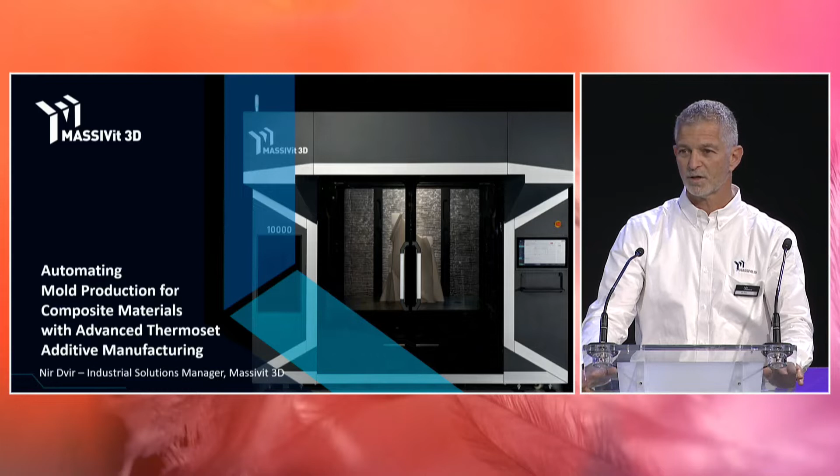Manufacturing molds in a conventional way consumes a lot of time and money. Massivit 3D's vision is to automate mold production. And the Massivit 10,000 that you can see here in the picture is part of our vision to automate mold production for composite material using additive manufacturing. But additive manufacturing also has challenges. A few of the biggest challenges are speed and size.

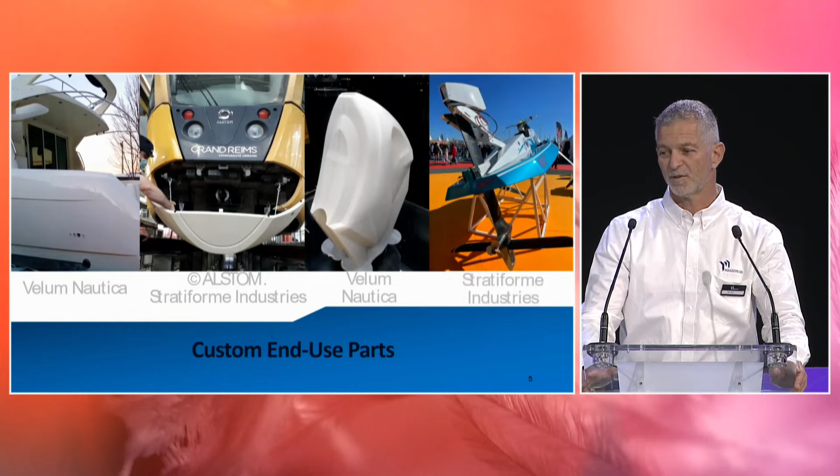Massivit 3D has been very familiar with speed and size for a few years already. Since 2013, our customers around the world are printing big and fast objects from marine, automotive, rail, and you can see a few samples. Also, prototyping full-scale concept models such as this car that was printed in France, furniture, and end parts or prototypes for automotive.

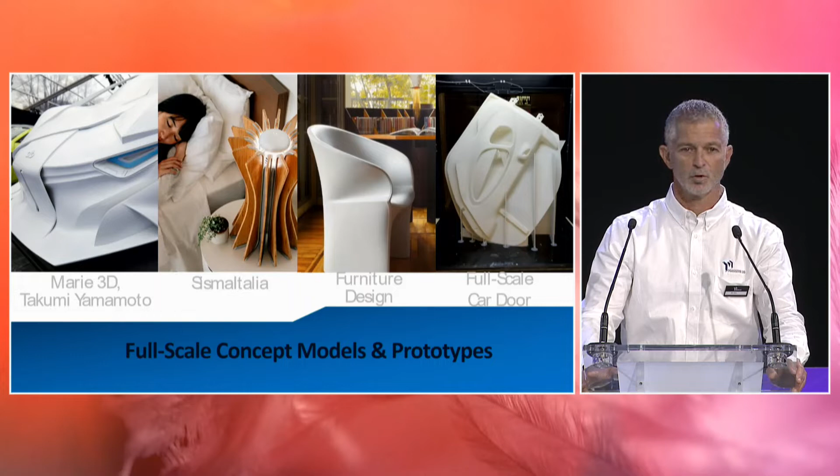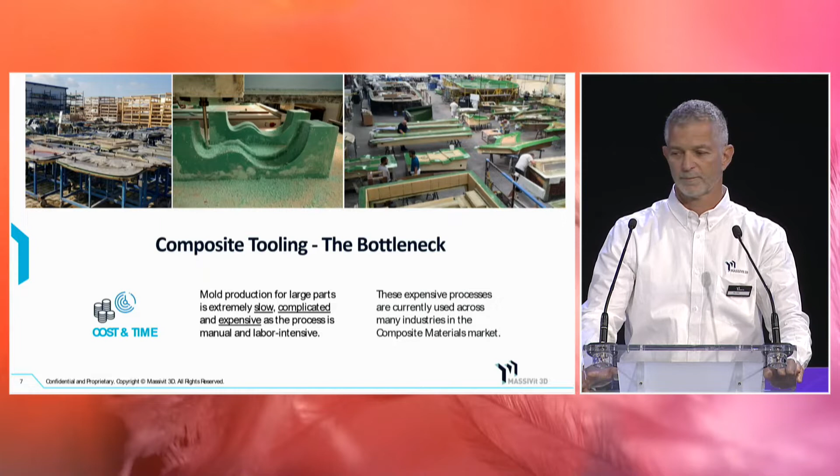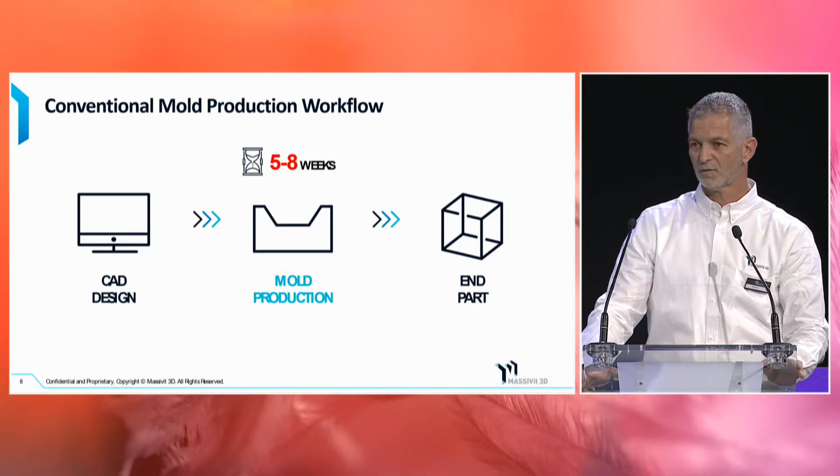But we are not here to talk about it. We are here to talk about composite tooling. We are going to talk about the bottleneck, which is mold manufacturing. Today, to produce a mold in a conventional way, you need 5 to 8 weeks. You might say less or more, but this is the average that we talk about. But what if we could make it faster? If we could automate this process and create molds in days instead of weeks?

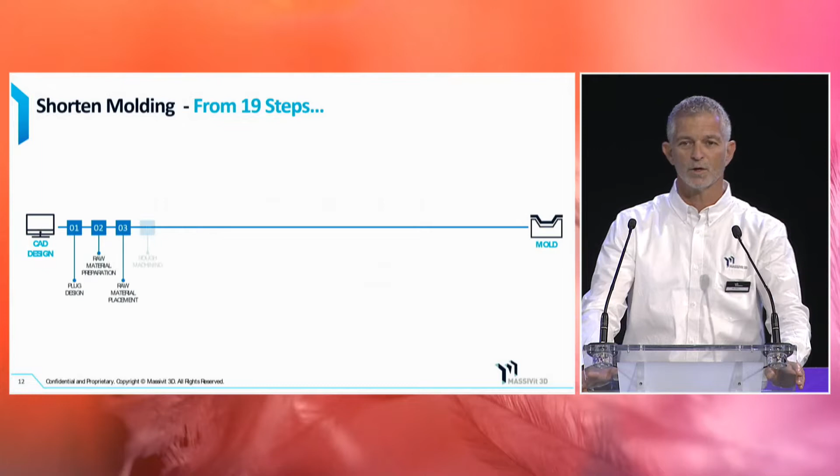The cast-in-motion technology will enable up to 80% faster tooling possibility. So how do we do it? Today, in order to create a mold, you need to create a master and a long process till you come to the end and can print your part. It will take you, again, 5 to 8 weeks.

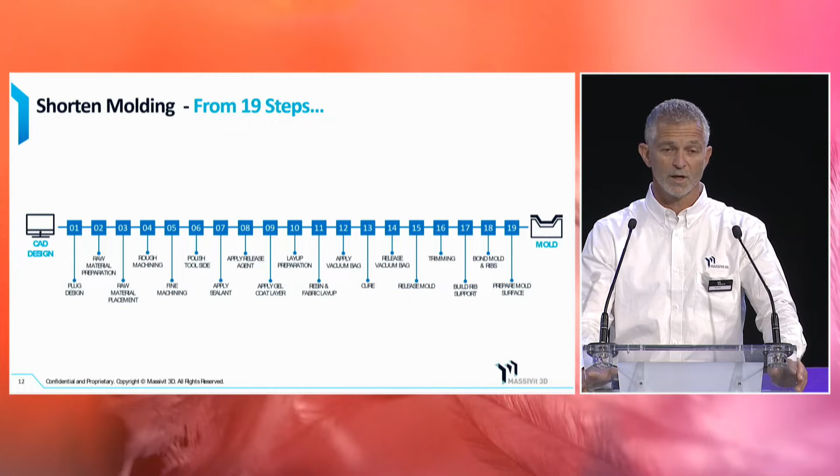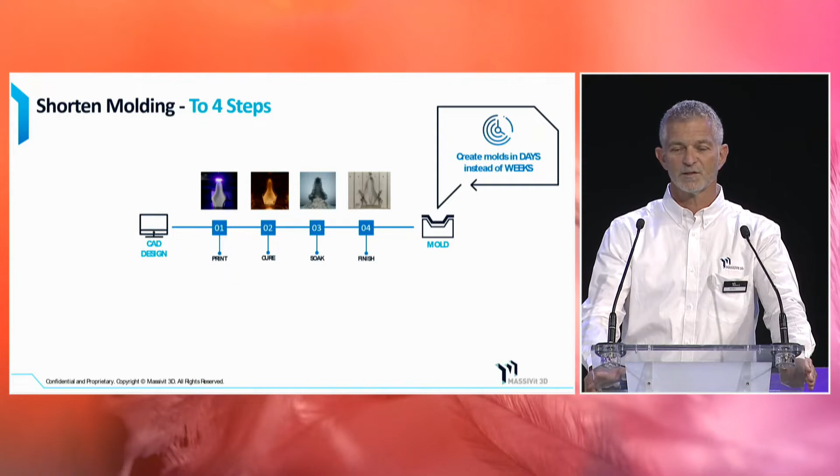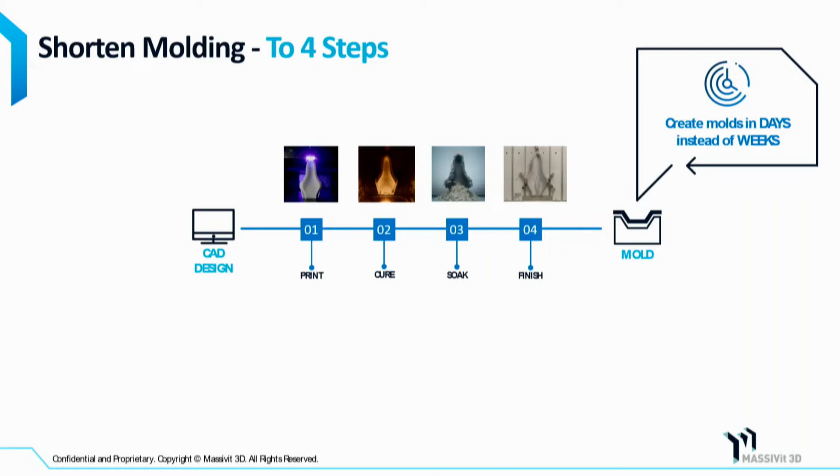With the cast-in-motion technology, we talk about 4 steps that will shorten this time. The first step, as you can see, is printing and casting epoxy into the print. Then it is the curing. After it's cured, we soak it in water. The shell will crumble off, and we remain with the part to be finished. Again, the idea is to generate molds in days instead of weeks.

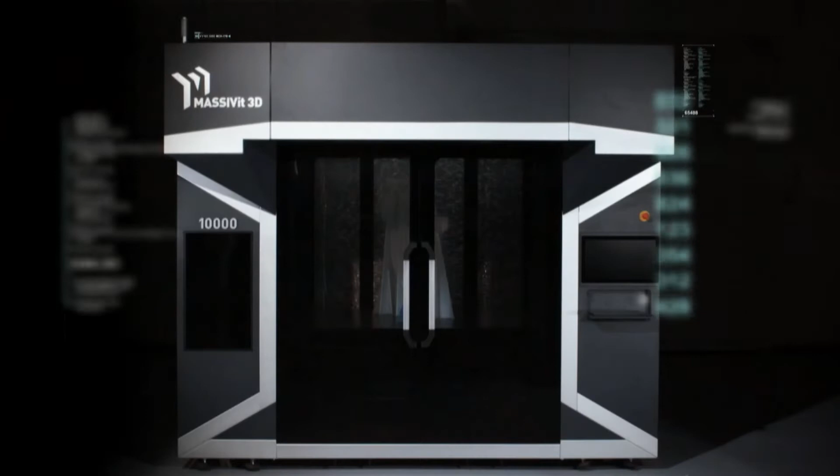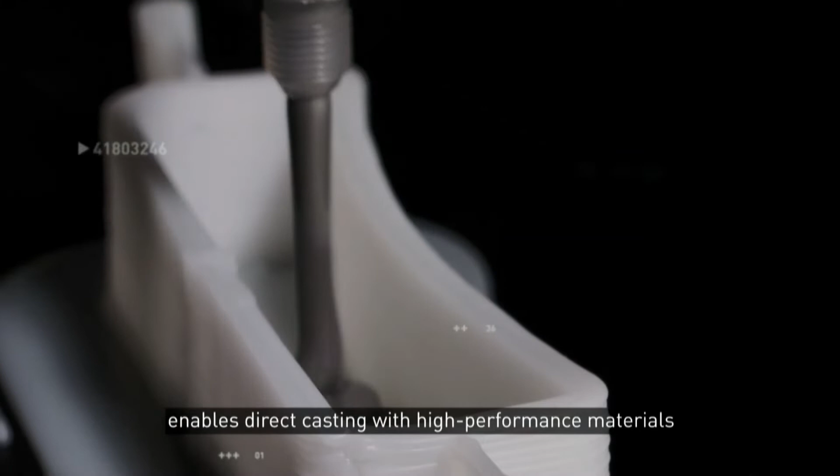I think we need volume for the video. But I think we can understand it also without the sound because it has subtitles.

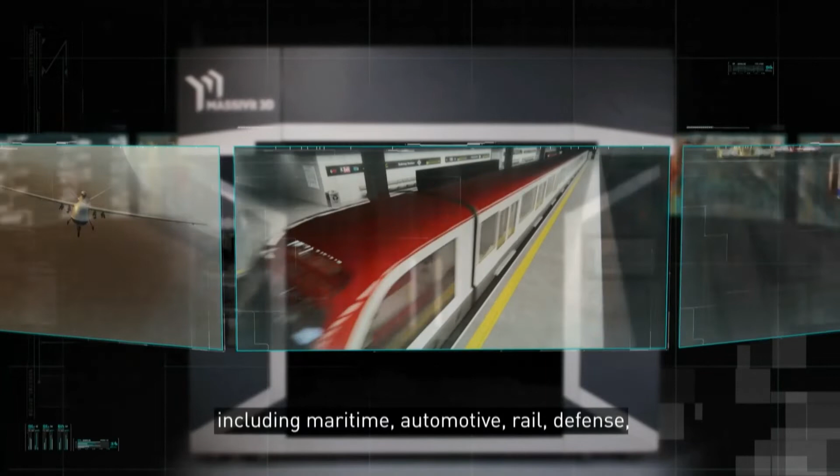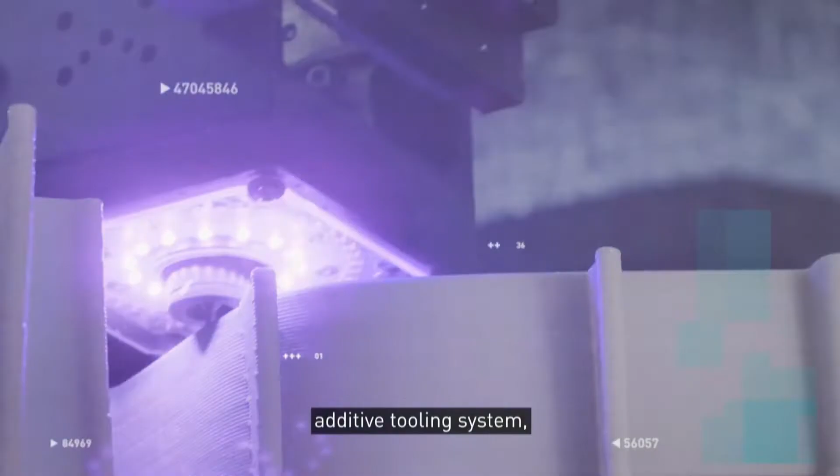So normally I use videos to explain what I want to explain, but today I'm going to support the video, as you haven't got to hear the sound. I want to jump directly into your mold that you want to produce. What you can see here is a mold already with the tooling, with everything that you need in order to produce it.

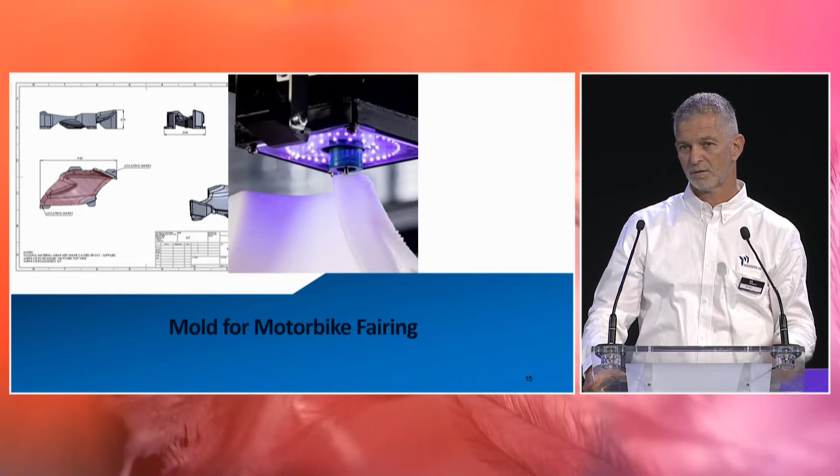On the left side, you see a head. This is our printing head. This is a dispenser, and out of this dispenser we are dispensing material that will cure immediately with the UV light. Once we have the shell printed, a casting head will come and cast epoxy into the shell that was just printed.

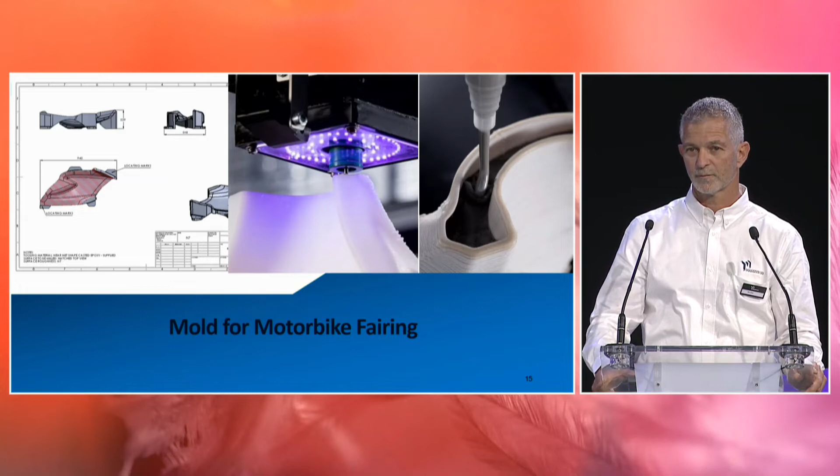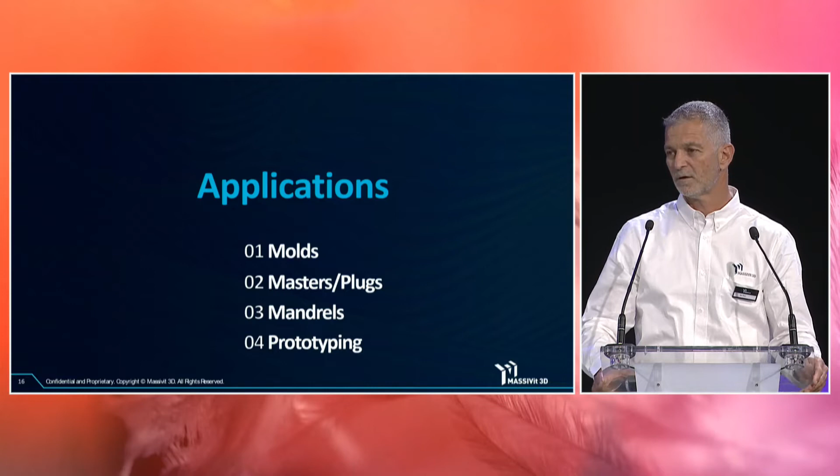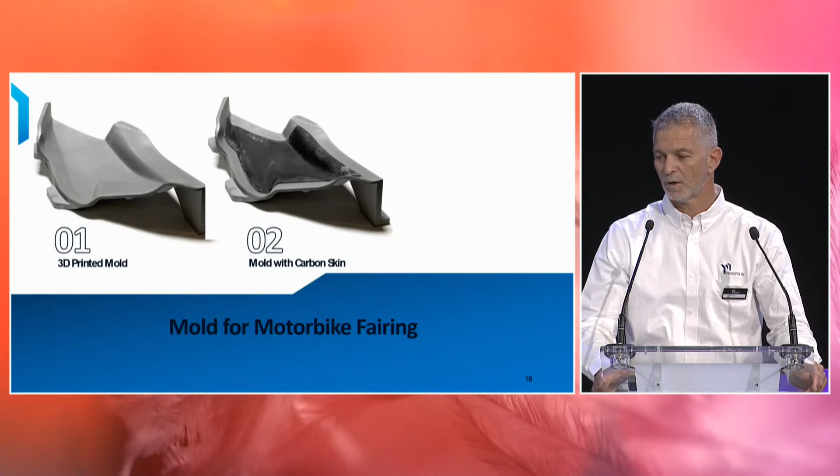What applications is the Massivit 10,000 covering? We talk about molds, masters, plugs, jigs and fixtures, mandrels, sacrificial patterns, and prototyping. Let's start with molds. The mold that you see here was printed on the Massivit 10,000 in just a few hours. As a standard process, you can see here the carbon fiber that was laid up and the part itself.

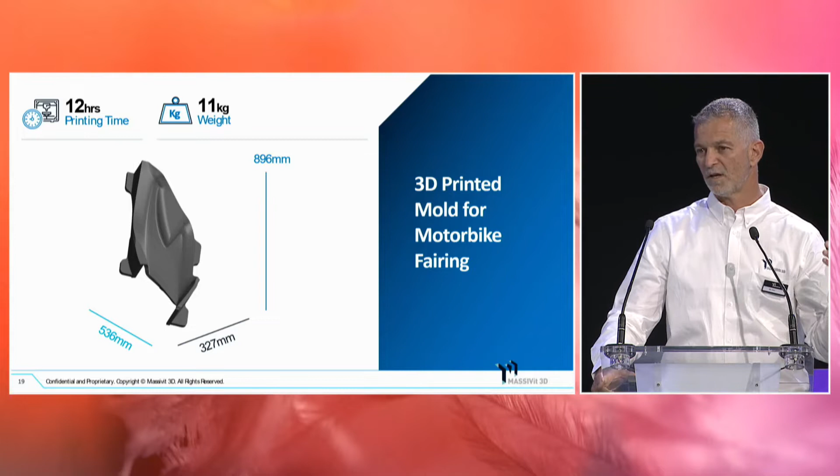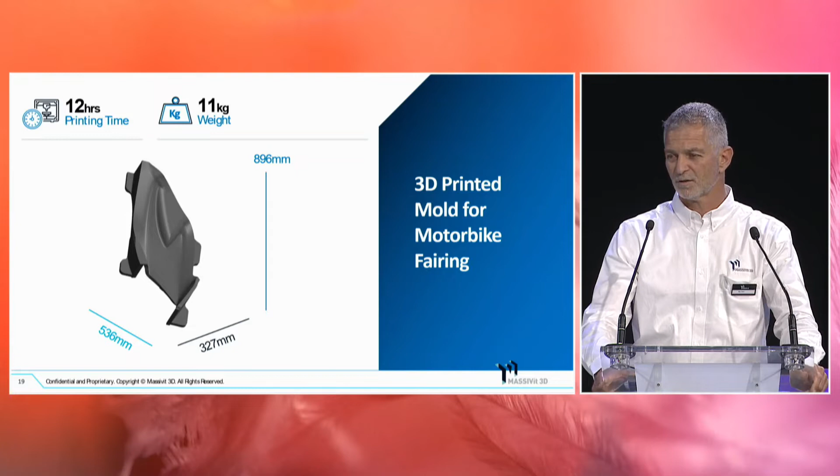Just to give an idea, within 12 hours, within less than a day, I have my mold ready without the need for any master before or the entire process. And the weight is only 11 kilograms. You can see that it's almost 900 millimeters, just less than a meter height.

More examples: a racing car seat. On the left side, number one, you can see the car seat with a specific design that we have done, tools that will be easy to handle, to put on the carriage or for anything in your process. You have the freedom in design and can print your structure as you wish.

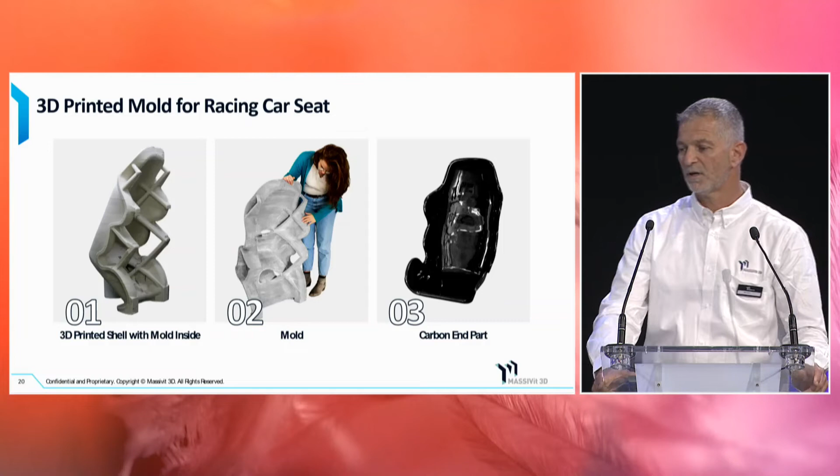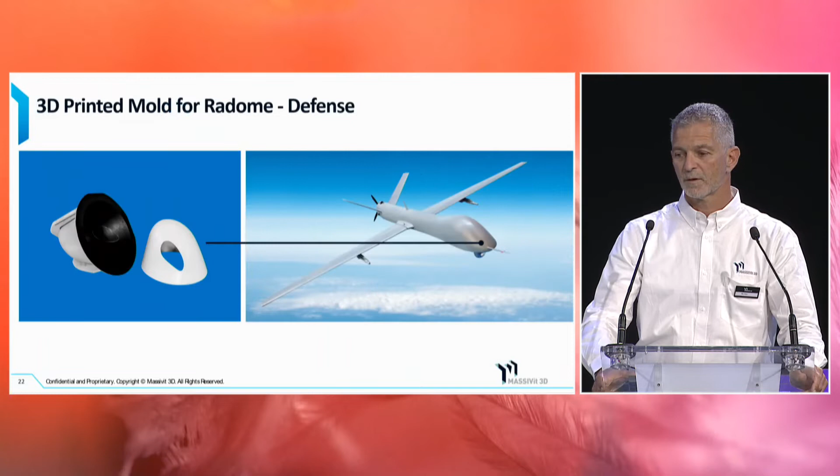What you see on the left side is the casted material and the shell itself. Number two is after we remove the shell, and number three is the carbon end part. Again here, it's almost 1 meter height, less than 2 days, only 42 hours to print it with 50 kilograms. More examples like radome that can be printed in less than half a day and 18 kilograms.

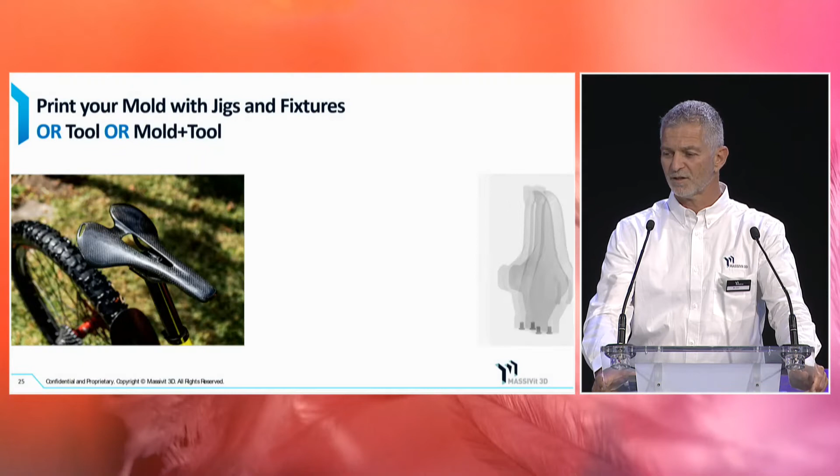But mold is only part of what can be produced with the Massivit 10,000. We talk about tools, jigs, and fixtures, or even a combination of those. Just as an example, we prepared something, and you can see it also at the Massivit 3D stand. Those are inserts that are getting, as part of the process, into the mold in order to allow a better workflow for your process, for the finishing process, for CNC in case that you are using it.

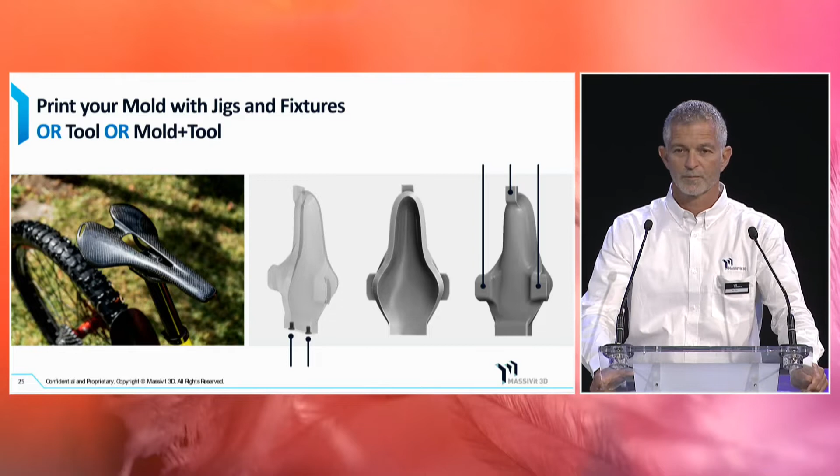Mandrel, sacrificial core, very important. What you can see on the right side is just the water breakable material print. No epoxy is involved. Again, we talk about mandrels that can be printed, that can be higher than 1.50 meters, and printing within hours. Why do I need it? In order to have complex molds for shapes that are complex or have a form that you cannot release the mold from. You just print a sacrificial pattern, and within a day you can have your mold ready.

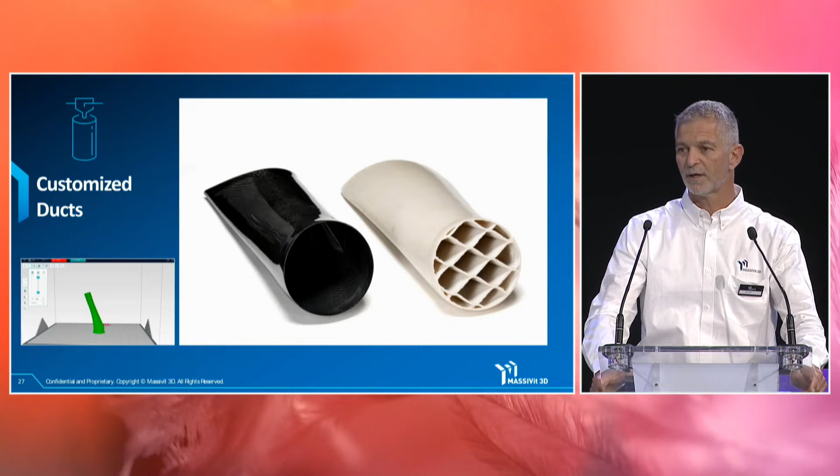Once you print the sacrificial pattern, you lay up your fabric with epoxy, you let it dry, you dip it in water, standard water, and the shell will crumble off, will fall off, and you will remain with your part.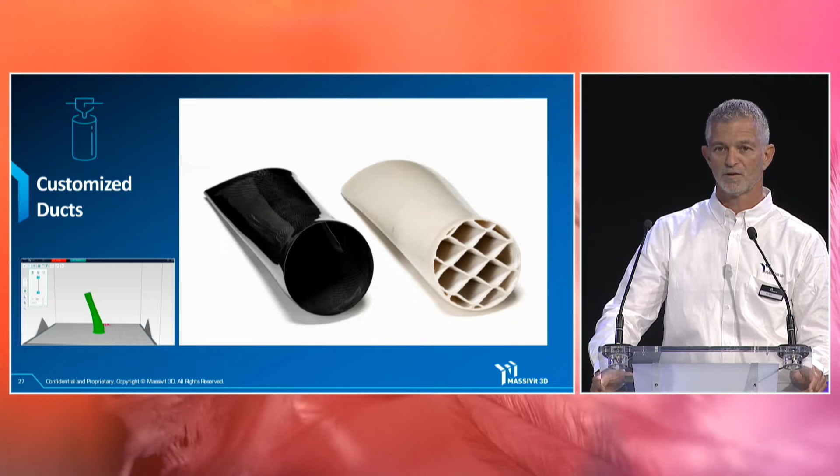Master and plugs. We talked before and explained that we want to save actually the master part, but it doesn't mean that you cannot print also your master. You can print mold, mandrel, master, plugs, anything, and there are cases where our customers would love to print also masters. In terms of prototyping or toolless manufacturing, for sure you do need that as well.

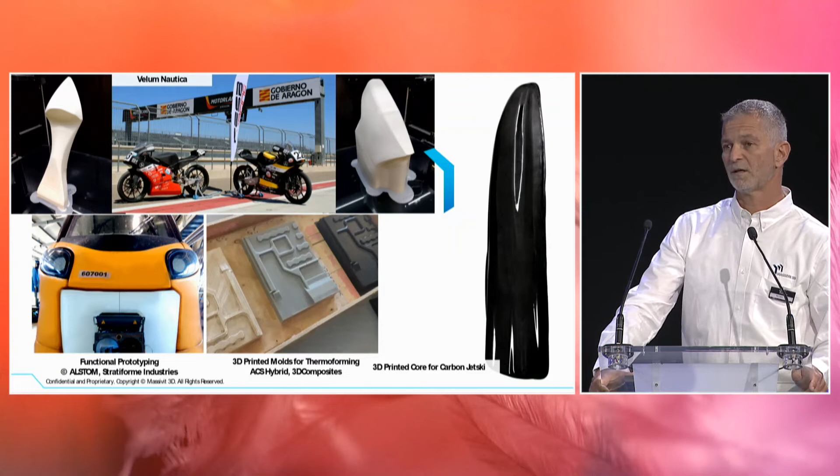And with additive manufacturing, with Massivit 10,000, you can also produce end parts. Here is an example for a motorbike or for the rail, actually here in France. Even a vacuum forming form that is generated by Massivit. Another interesting possibility is to leave the core and to use your fabric composite material on top of the core, as presented here at the jet ski hull.

Let's talk a little bit about the technology. As you can see, the Massivit, we talk about a print volume of approximately 1 meter 10 by 1 meter 40, and a height of 1 meter 50. Diagonal, we can reach up to approximately 1 meter 70. And we talk about the capability to print directly the mold, skipping any process, in just 4 steps, and we discussed it already, saving up to 80% of the time.

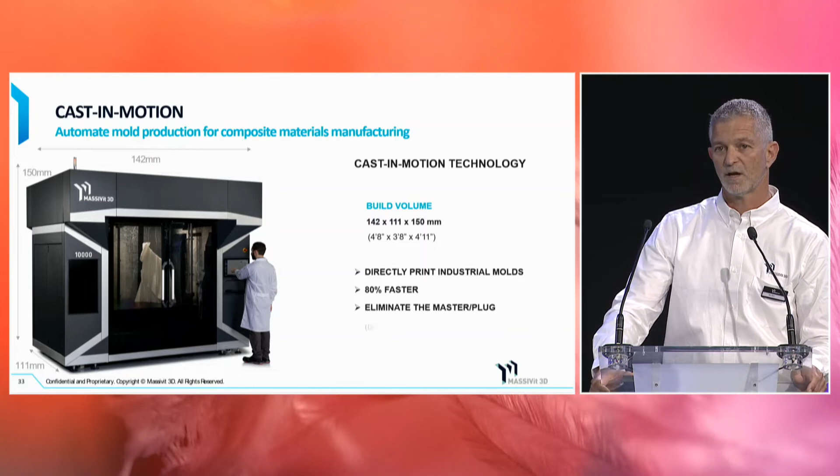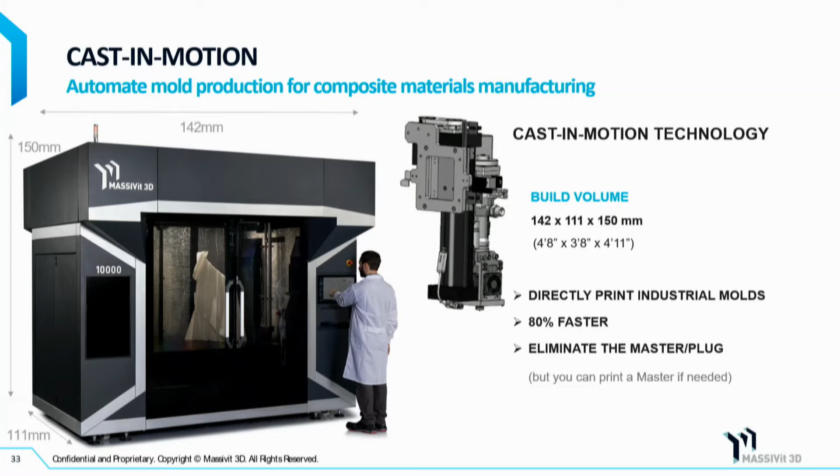The technology is based on dual heads. Here in the presentation on the left side, what you can see is the dispenser. The dispenser has a UV ring, and the material that is coming out of the dispenser is UV curable, and with the UV ring we cure it immediately, and we save on time and material as we can print hollow objects. On the right side you can see the casting head, and at the casting head we mix epoxy just at the spot. It means that the epoxy is ready next to the machine, and once needed, epoxy will be mixed and casted between the shell that was just printed with the first head.

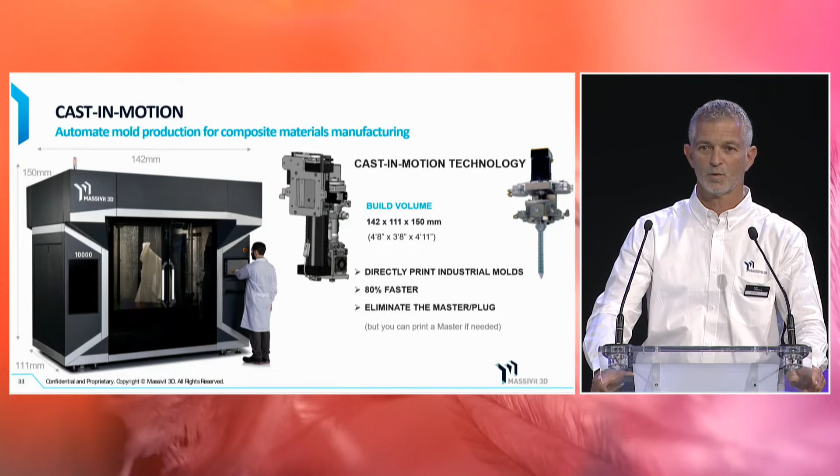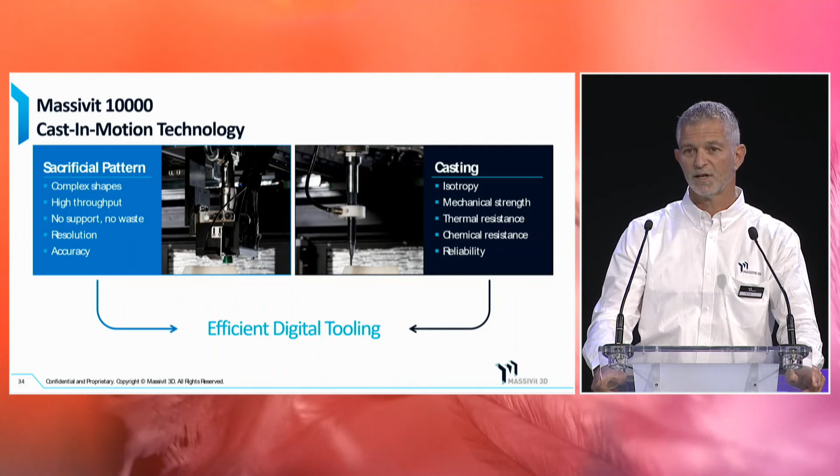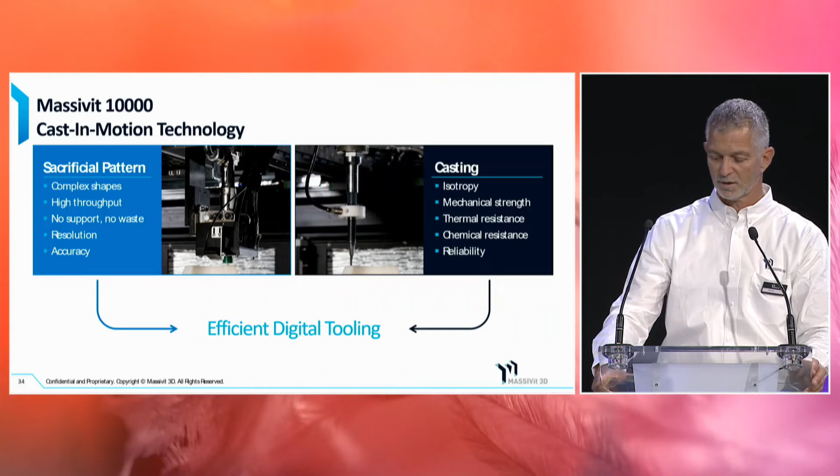To be more specific, why do we use this technology? With additive manufacturing and with the Massivit 3D technology, you can print complex shapes. And this is our dispenser. The dispenser is responsible for the complex shape, for high throughput, and the fact that I'm printing just what I need without wasting any material, and full control of the resolution and accuracy. On the right side, what you see is the casting head, and at the casting head, we talk about isotropic, and I will go deeper into it in the next slides. We talk about mechanical strength, thermal resistance, chemical resistance, and at the end, we talk about efficient digital tooling.

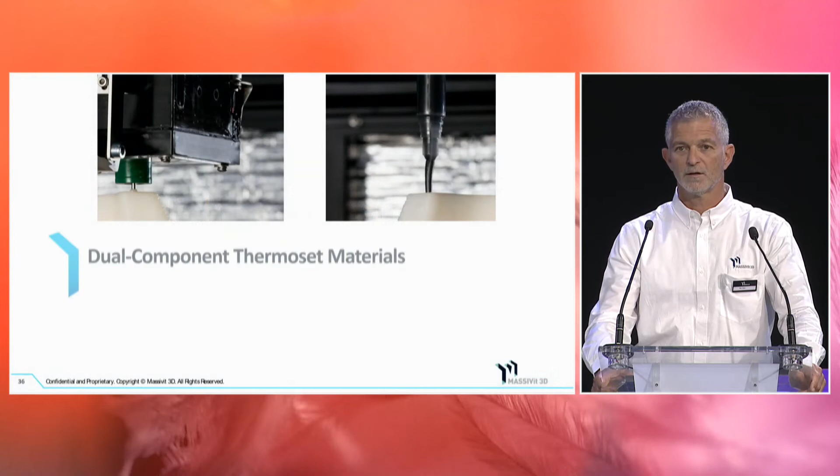If we talk already about material, we are using high-performance materials. The water-based, water-breakable material: you have to think about a material that will be cured with UV, an acrylic material that will be printed with a UV lamp, cured with a UV lamp, but on the other side, by the end of the process, has to fall apart out of the epoxy. The material that we are developing allows us the high accuracy, the complex geometry, and of course the light removal of it out of the epoxy.

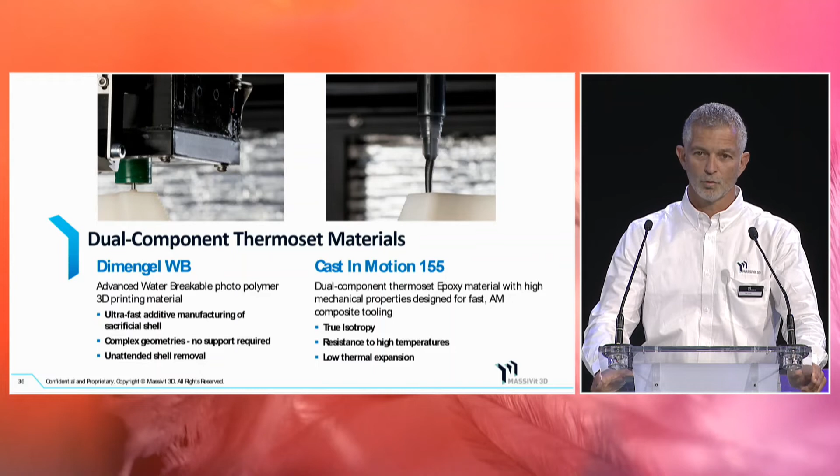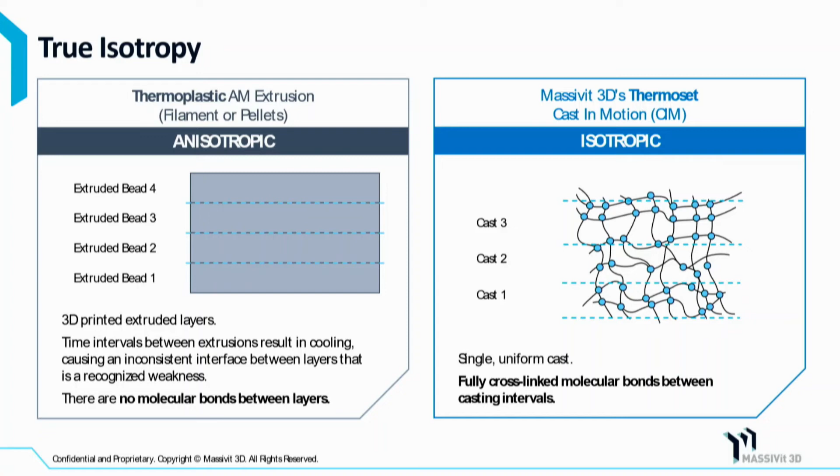And the cast-in-motion material: we talk about the resistance for temperature, low CTE and true isotropic. Now when we talk about isotropic, in additive manufacturing, most of the technologies are printing one layer on top of each other. There are no molecule bonds between the layers, and by that you are getting an anisotropic behavior in X, Y compared to Z. While with cast in motion, we are casting in intervals, and those intervals allow a full cross-link of the molecules and bonds, and with that, a fully isotropic geometry, which is very, very important for your production.

Many applications and industries are utilizing composite material. We are here to support those entire industries and applications, and with the fact that we are able to produce molds in days instead of weeks, we are supporting those industries and opening the bottleneck for all of them to develop, and develop faster.